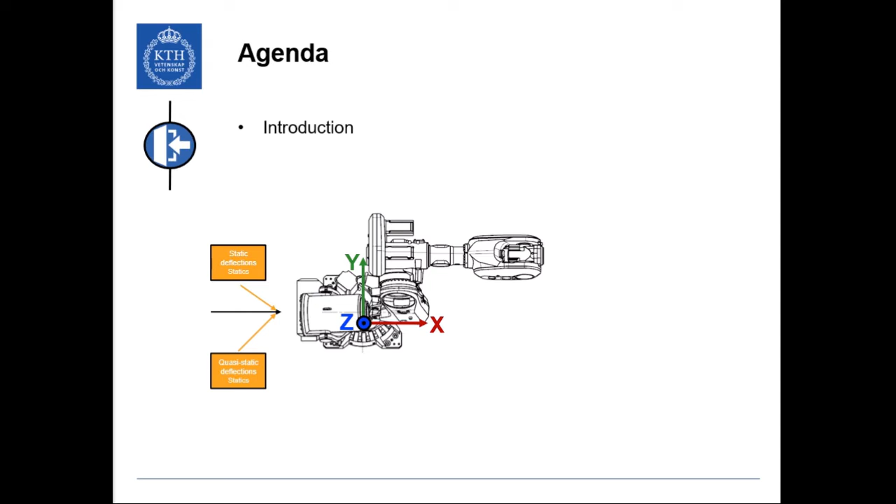This presentation consists of 4 sections. The introduction section focuses on the goals of the COMACH project and relates them to performance criteria and test methods according to ISO 9283. These can be used to quantify the capability of an industrial manipulator when the robot is carrying a payload, and other performance criteria such as quasi-static deflections, which can be used to assess the robot in contact applications. The main section is the methodology section.

It presents measurement instruments and procedures for both the static and quasi-static deflection of industrial manipulators. The results and discussion section focuses on the application of the proposed comparison implemented in a case study on a large-sized serial articulated industrial manipulator in 5 different positions of its workspace at KTH. Then it explains how the data can be used for compliance calibration.

This presentation ends with a summary of the work conducted in the field of quasi-static compliance calibration, as well as an outline of ongoing work. It outlines its opportunities and limitations, as well as the next steps to support compliance calibration.

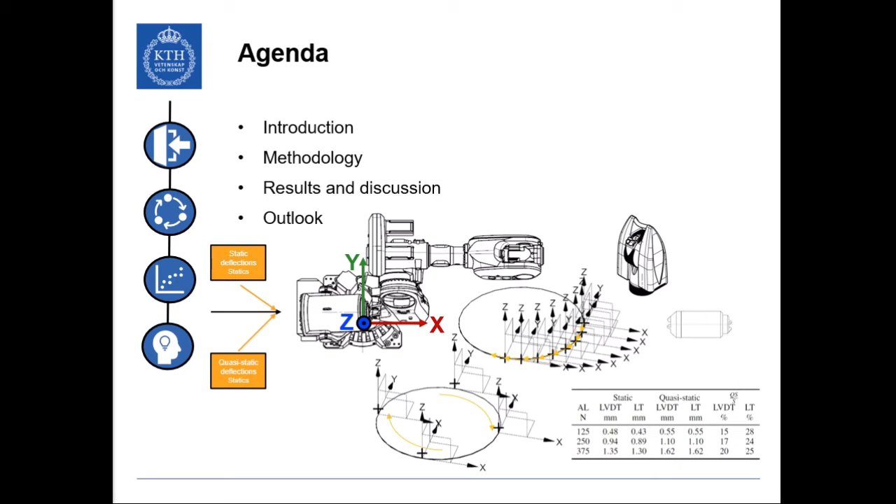Introduction. COMACH Task 3.1. The parties responsible for the coordination of this work are KTH in close collaboration with ABB and Hexagon. The compliance calibration procedure, together with the compliance compensation system, should ensure an average positioning accuracy under load better than 0.25 mm. This task focuses on the definition of an offline compliance calibration procedure for articulated industrial robots. The core elements of the task are the robot modeling and measurement, which is the process of defining an appropriate mathematical model and then identifying the different model parameters such that the model describes the actual robot as good as possible. It must balance the detailed representation, which enables a good prediction, and practical identification, curbing the number of model parameters.

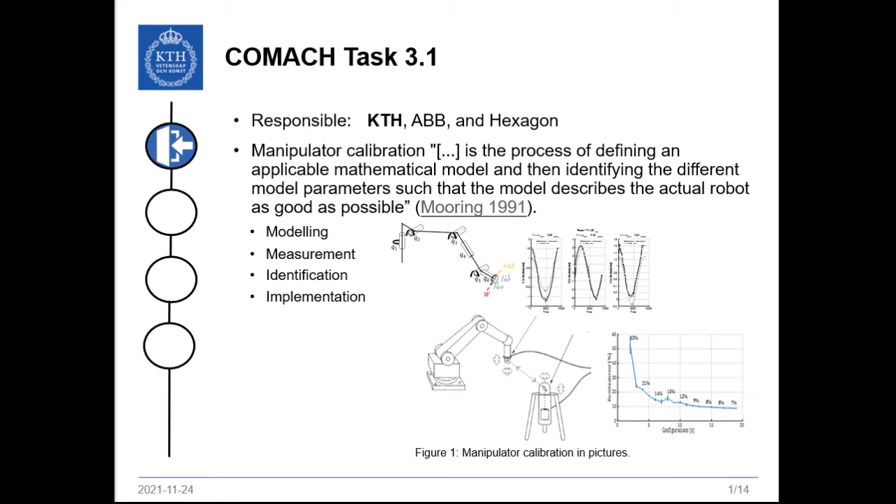ISO 9283. According to the information provided by the International Federation of Robotics, most industrial manipulators are used in tasks in which the manipulator carries a payload. In this case, kinematics, gravity torques and controller settings are the most important performance criteria to assess the applicability of an industrial manipulator for its intended purpose. The tasks are reflected through performance criteria such as the pose as well as path accuracy and repeatability. These indicators are commonly stated in the product descriptions of the manufacturers of industrial manipulators.

Poses are measured at targets with a static manipulator, while paths are measured under motion with the manipulator following a trajectory. Figure 2 visualizes potential poses and paths according to the recommendations by the ISO standard. However, these performance criteria, according to ISO 9283, are less informative when the manipulator is engaged in contact applications such as metal cutting.

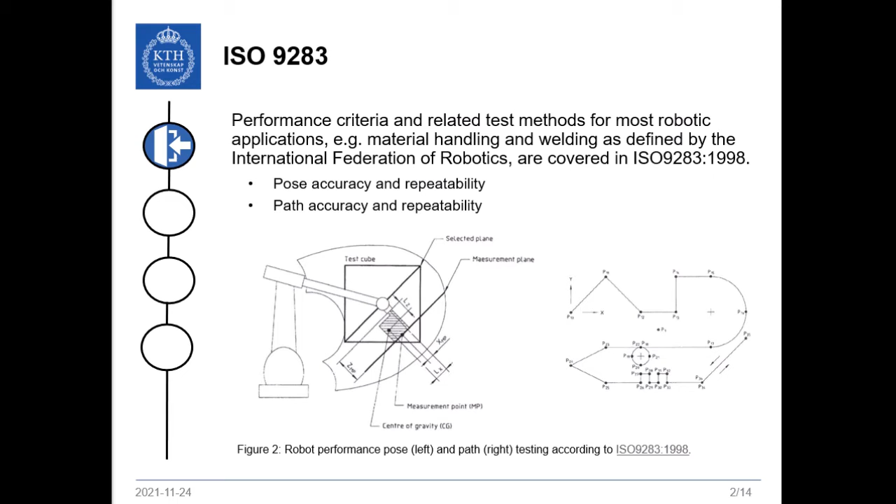Contact applications. Metal cutting, such as trimming, grinding or deburring, can be considered as contact applications. There exists no standard about the evaluation of performance criteria of industrial manipulators in contact applications, as it is only a minor share of manipulators that is installed for that purpose. Of the shipments of industrial robots from 2011 to 2015, it was only approximately 1% of the robots that were installed for metal cutting as the intended use.

Due to the absence of a standard, researchers are inspired by the state-of-the-art of performance evaluation of lathe and machine tool. One of the main criteria under investigation is compliance or stiffness. The stiffness of a mechanical system can be defined as its capacity to sustain loads and it can be quantified through modeling or measurement. A priori modeling approaches employ finite element analysis. These are usually reserved for robot manufacturers and researchers. Then there are a posteriori measurement approaches to evaluate compliance. There are online approaches that identify the stiffness of an industrial manipulator from features of machined workpieces, and there are offline experimental approaches. This work focuses on offline experimental approaches.

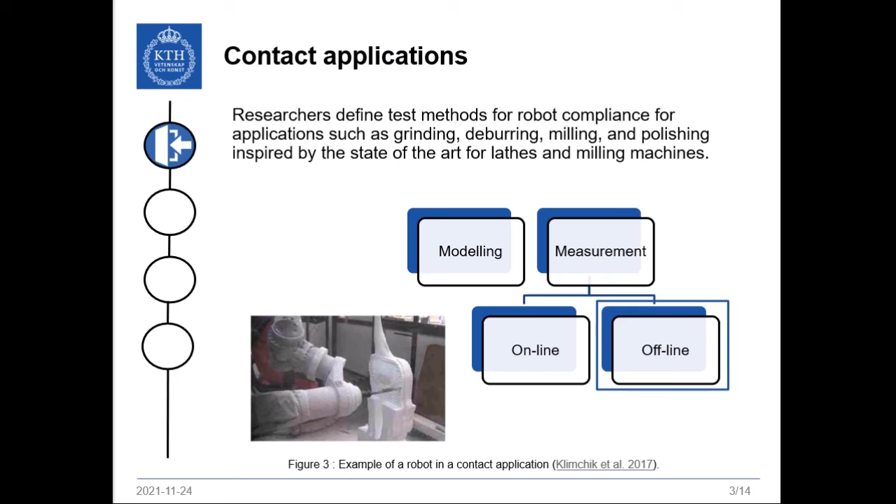Serial articulated manipulators in quasi-static contact applications. ISO 9283 provides guidelines for the measurement and evaluation of static compliance. This is representative of a robot carrying a payload. However, this work intends to emulate the quasi-static component of a metal cutting process. The quasi-static component of the process force consists of the slow and periodic force with a frequency lower than approximately 0.5 Hz. This quasi-static component is qualitatively highlighted in Figure 4. This concludes the introduction section.

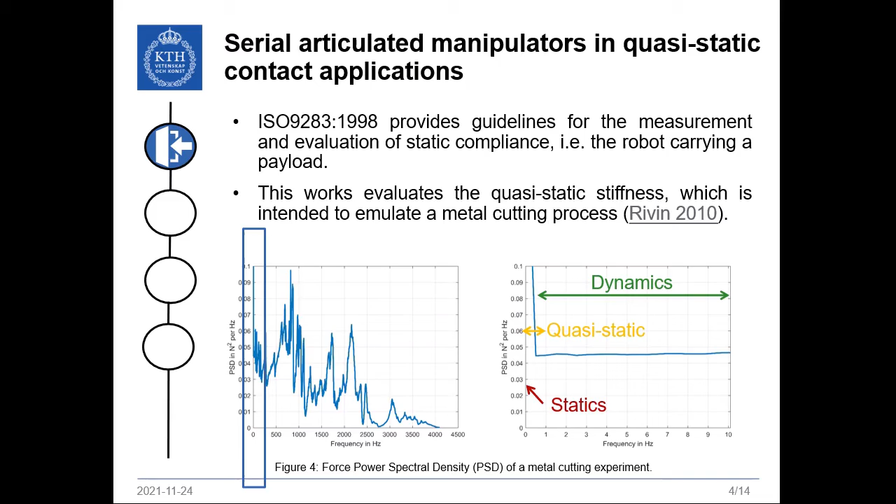Methodology. Measurement instrumentation. The conceptual measurement setup can be seen in Figure 5 on the right-hand side. The setup comprises the following equipment.

Number 1, a large-size serial articulated industrial robot with its corresponding controller, which is not included in the picture. Number 2, a Leica AT901 long-range laser tracker, not included in the picture but symbolized through the 0.5-inch spherically mounted retroreflector. Number 3, the measurement instrument loaded double ball bar. Number 4, a rigid table link. And number 5, a dummy end effector with tool center point and mechanical interface for the spherically mounted retroreflector.

The deflection measurements are performed with two different metrology loops. The first metrology loop uses an LVDT for the deflection measurement. The second loop uses the laser tracker.

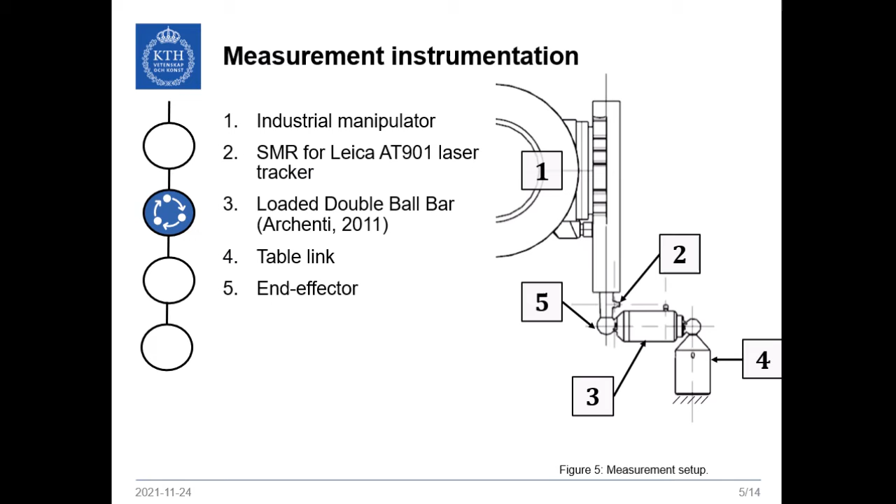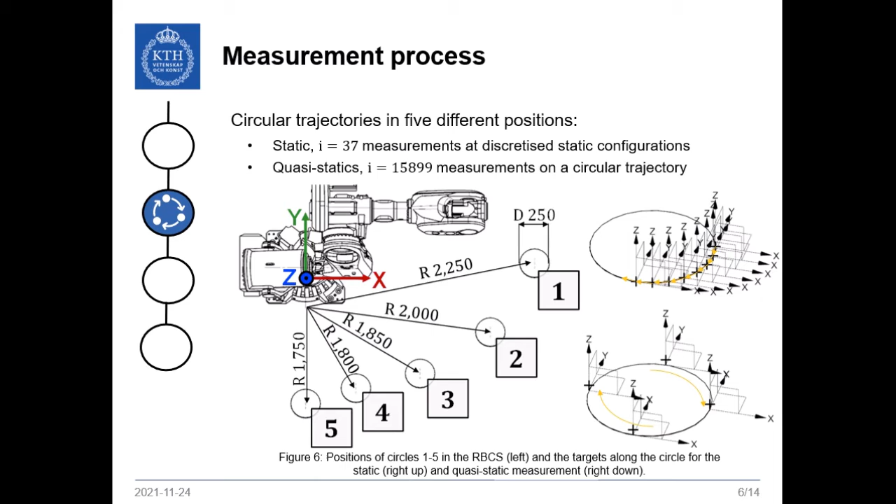For the quasi-static measurement, the manipulator moves to a start configuration, then the robot is loaded, then the manipulator moves along a circular trajectory, and only after completing the circular trajectory, the robot is unloaded. This dissected the circle into approximately 16,000 measurement points. Both measurements induce loads of 125, 250, 375 and 500 Newton. For both the static and the quasi-static measurement, multiple force components were exerted simultaneously.

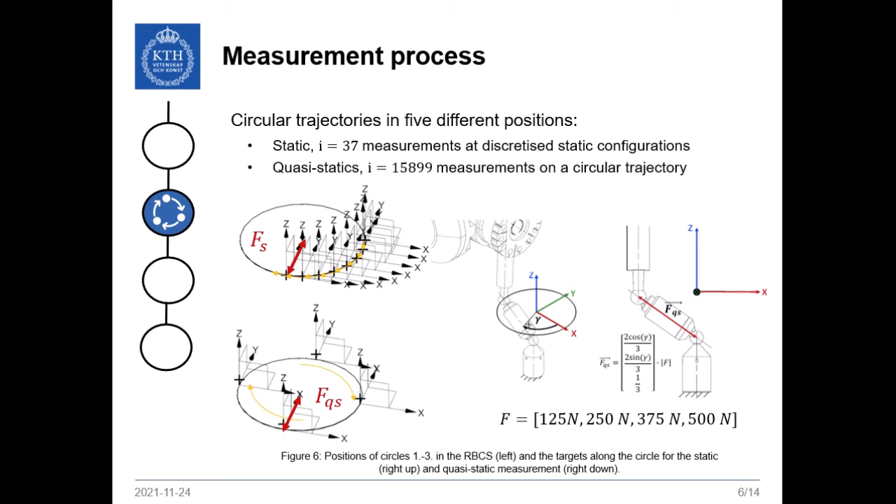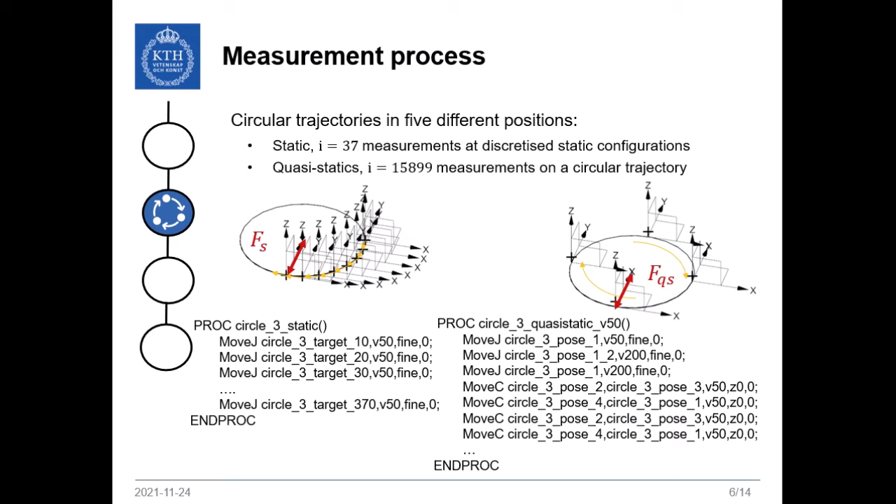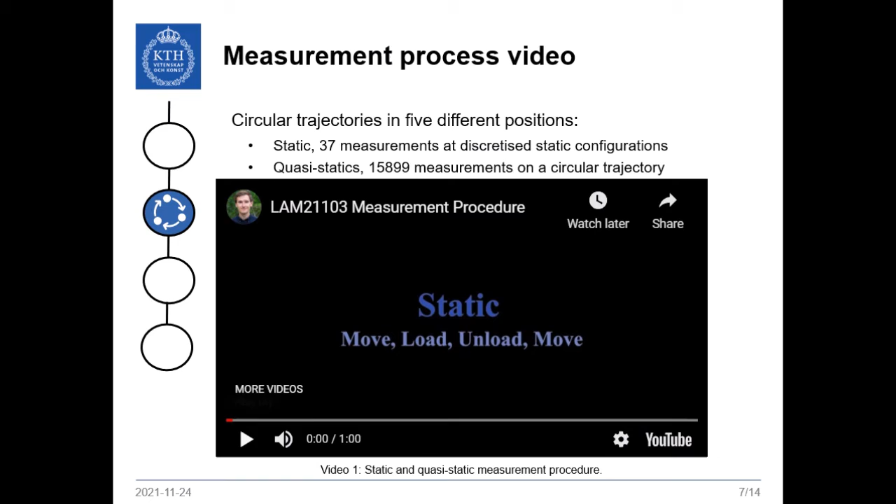The task program used for the static and quasi-static trajectory are highlighted below in RAPID instructions. Video 1 shows both the static and the quasi-static measurement procedure. The static measurement procedure can be described as the move, load, unload, move sequence. The robot moves to a configuration, then it gets loaded, the deflection is measured, it gets unloaded, and then it moves to the next configuration. And the process is repeated.

In the quasi-static case, the manipulator executes a trigger movement by moving 1 mm up and down at the start point of the circle with a velocity of 200 mm per second. Then the manipulator moves 2 times clockwise about the same circular trajectory. The circles were measured with an angular overshoot of 180 degrees to exclude transient effects from the measurement data. The manipulator followed the trajectory with a Cartesian velocity of 50 millimeters per second. At this velocity, dynamic effects can be assumed negligible. Both the laser tracker and the LVDT are set to continuous data recording at 1000 Hz.

Data analysis. The deflections delta x are calculated as the position differences of the loaded tool center point position x_ij and the reference tool center point position x_i,ref at a load of 125 Newton. The indices i and j represent the positions and the loads along the circular trajectory. There are 37 static configurations and 15,899 quasi-static configurations. All deflections are calculated relative to a reference load of 125 Newton to remove the influence of play in the setup, the kinematics of the manipulator, as well as backlash in the manipulator.

For the quasi-static deflections at the i-TCP positions, first the angular overshoot needs to be removed, then the difference can be calculated. In both the static and the quasi-static case, the measurement from the LVDT needs to be compensated for the deflection of the table link. The magnitude of the deflection, which is referenced in the subsequent section, is calculated as the Euclidean norm of the deflection. In the following section, the wording apparent load is used to highlight the idea that at an apparent load of 125 Newton, the system is loaded with 250 Newton, but the difference is calculated with respect to the reference load at 125 Newton.

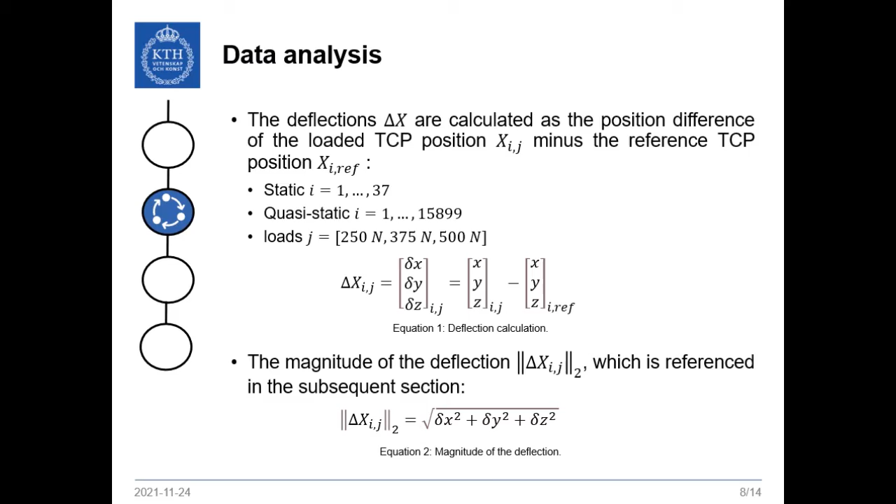Results and discussion.

The magnitude of the static and quasi-static deflections along circle 5 for apparent loads of 125, 250 and 375 Newton can be seen in the tables on the bottom. The magnitude of the deflection, as one would expect, increases with the load, but also changes along the circular trajectory as the Cartesian stiffness of the industrial manipulator depends on the configuration.

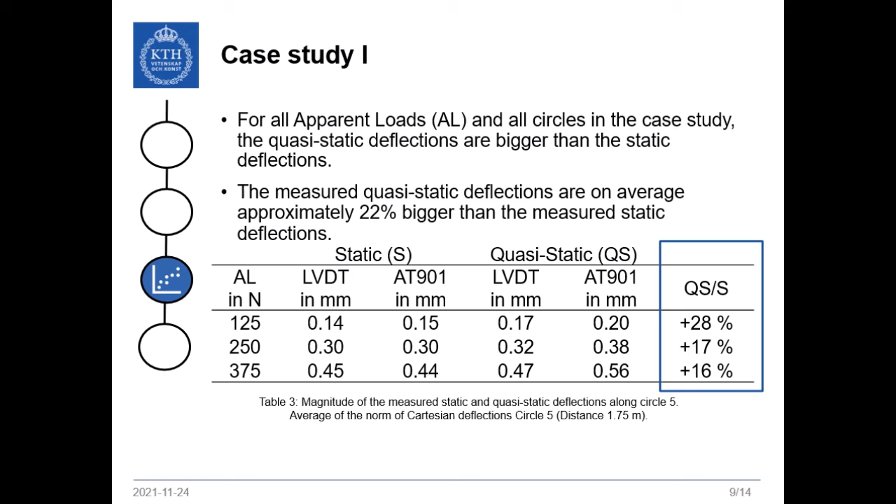The tables show the apparent load, the static deflection as measured by the LVDT and the laser tracker, the quasi-static deflections as measured by the LVDT and the laser tracker, as well as their quotient. The measured quasi-static deflections are on average approximately 22% bigger than the measured static deflections. The quasi-static deflections are at most 28% bigger than the static deflections.

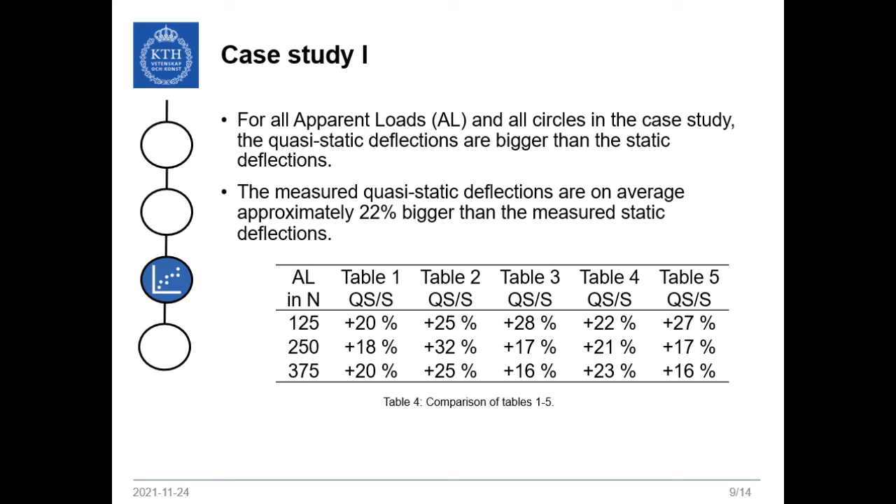For all apparent loads and all circles in the case study, the quasi-static deflections are bigger than the static deflections. The data have been measured using the LVDT as well as the laser tracker. The difference in the measured LVDT and the laser tracker data can be accounted for by the distance between the two measurement points. The static and quasi-static deflections are very similar in their characteristics, but they differ in their magnitudes.

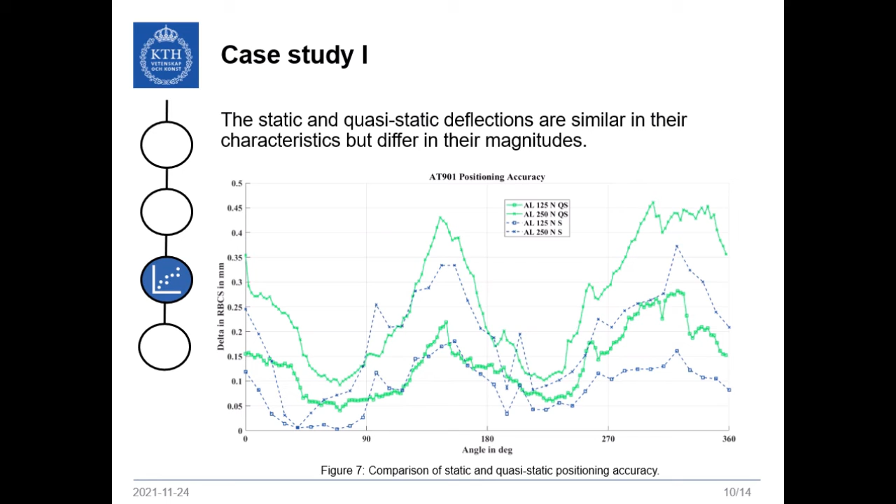Compliance calibration. The compliance model relates the loaded to the unloaded end effector pose for a configuration of the robot under the consideration that an external force is applied in a linear stress-strain region, that is, the deformation of the structural loop components due to their finite stiffness is linear.

This work uses a compliant manipulator model based on rigid bodies with flexible joints, also called a lumped parameter model. The joints can be represented as linear elastic torsional springs. This simple stiffness parametrization lumps together several non-kinematic error sources such as the link deformations as well as motor and gearbox friction, as they will affect the measurement data.

The joint stiffness values are identified based solely on the measured translational displacements without accounting for the rotational displacements. For each tuple consisting of the configuration in terms of the joint angles, measurement points as well as wrench and deflection vector, a joint stiffness matrix can be identified. A linear least square parametrization is used to optimize the parameters over the measured joint angle domain.

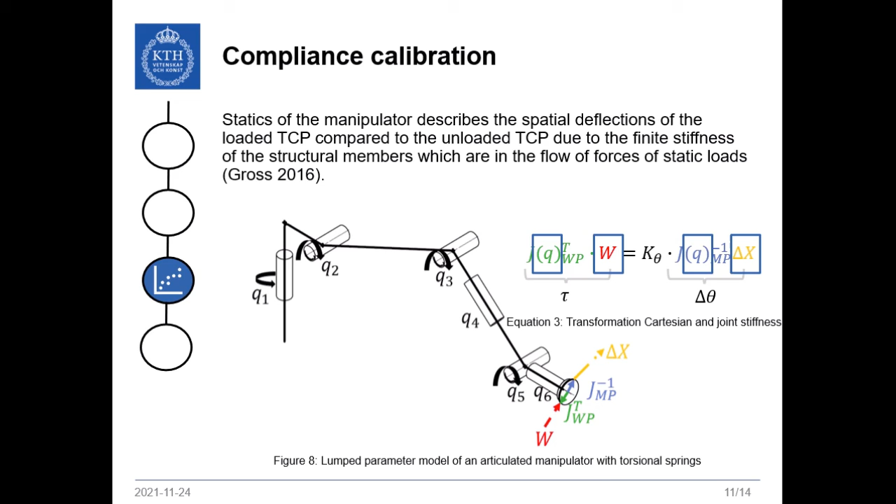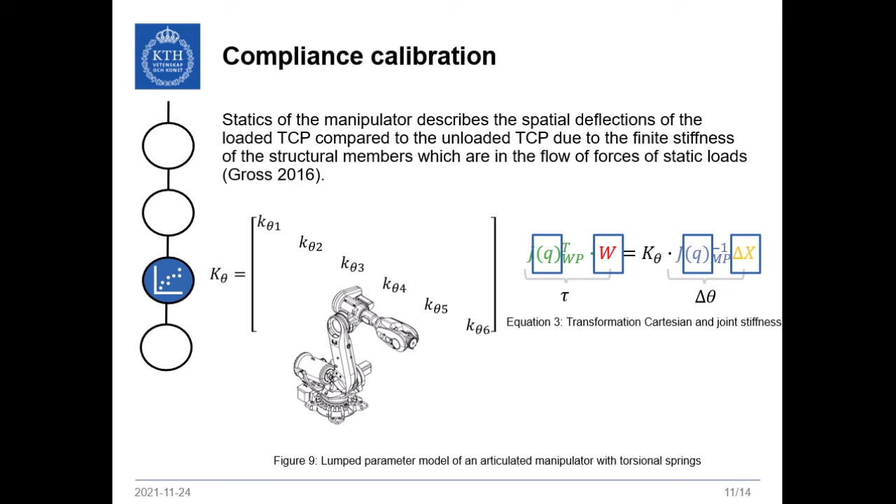The identified joint stiffness matrices in terms of the static and the quasi-statics for circle 1 to circle 5 reflect the difference in the deflections as a loss of apparent stiffness, as can be seen in Table 5. This was expected as the magnitude of the deflections affects the identified joint stiffness values linearly under the assumption of invariant configurations and wrenches. Table 5 displays the norm of the stiffness matrices as well as the relative difference between the static and quasi-static stiffness matrices for the same circle.

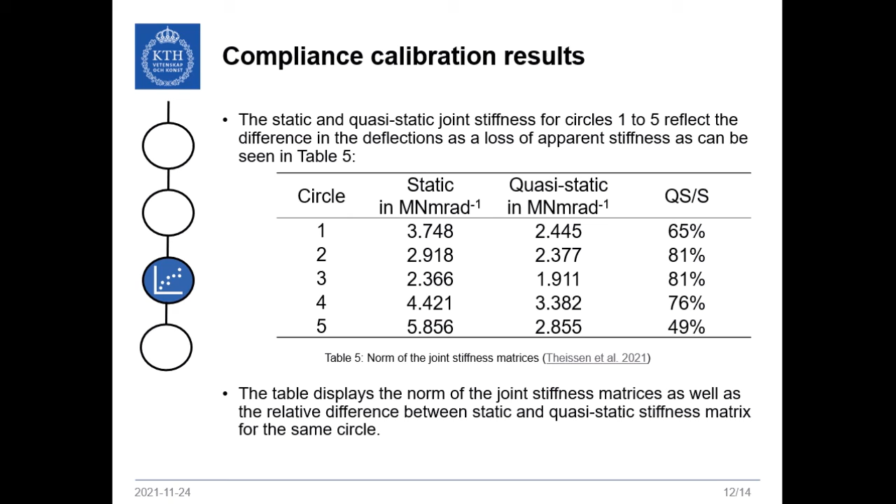Outlook. Measurement of a KUKA, Stäubli and ABB robot. For further analysis, static and quasi-static deflections of industrial manipulators of 3 different robot manufacturers were measured. All measurements are performed with different apparent loads.

The circles are positioned at different positions of the working space, while all robots were programmed to perform quasi-static trajectories at a velocity of 50 mm per second. As one can see from the summary of the experiments in Figure 10, also for the KUKA and Stäubli robot, the quasi-static deflections are significantly bigger than the static deflections. Also, in these cases, it appears that the deflections have the same trends in the workspace, however, their magnitudes differ. Furthermore, one can see that the deflections vary significantly among the industrial manipulators.

Please consider that none of these measurements provides the best approximation of the manipulator's stiffness, as the structural loop features different end effectors, resulting in different system stiffnesses at the tool center point.

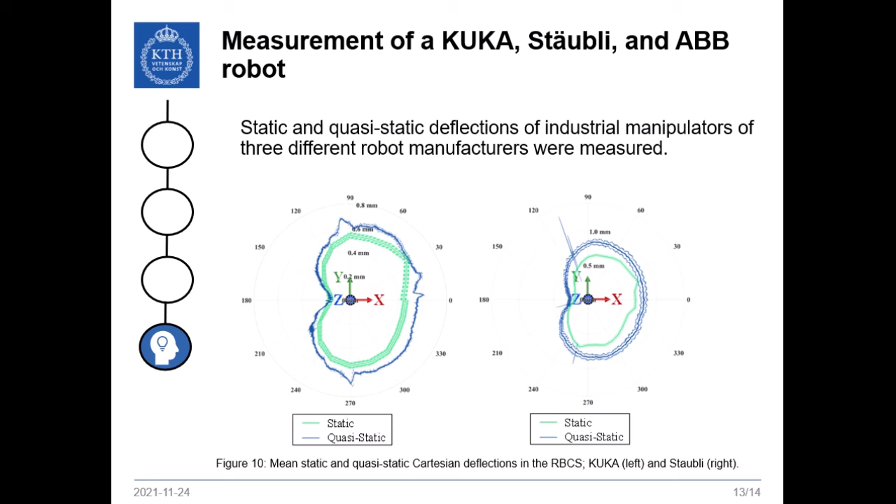Error separation analysis. The results displayed in this presentation imply that there can be significant differences in the magnitude of the static and quasi-static deflections of articulated manipulators. Thus, KTH, ABB, Mondragon University and IDEKO started a collaboration for an error separation analysis to quantify the influence of velocity, control parameter settings, as well as the magnitude of internal and external torques on the static and quasi-static deflections of industrial manipulators of 3 different robot manufacturers.

The quasi-static measurement procedure seems a more applicable evaluation method to represent the actual manipulator more accurately for manipulators moving at low velocities. This means that the compliant quasi-static robot model, that is the robot stiffness model which is derived from a quasi-static measurement, may yield more accurate estimates for the trajectory optimization compared with static stiffness in the implementation phase of manipulator calibration. This may facilitate a pragmatic compliance calibration of industrial manipulators.

The pragmatism in that sense lies in the possibility to calibrate an industrial manipulator task-dependent, meaning that in the relevant portion of the workspace with loads in the magnitude of the task. This may make compliance calibration cheaper, faster, and potentially more accurate.